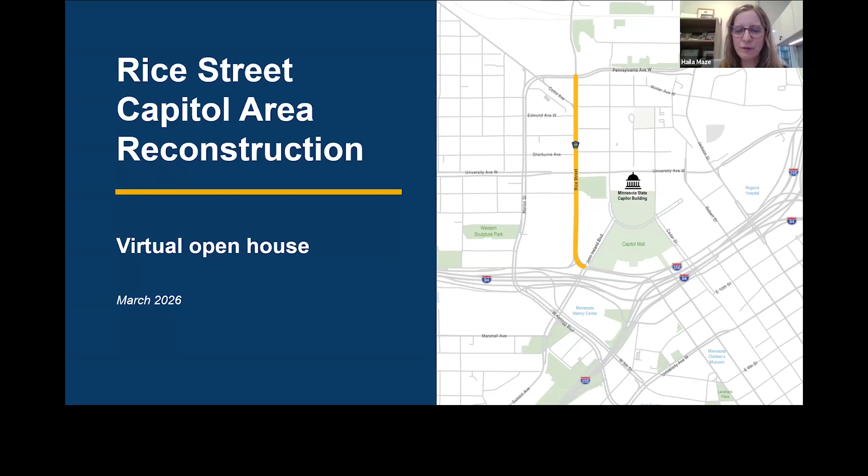We're going to start this presentation with a special poem by one of our Rice Street Engagement Team members, Malik Curtis, also known as Juice Lord. He is an MC, poet, actor, and educator from here in St. Paul, Minnesota. Raised in the Rondo community by older parents who instilled strong values of respect, love, and community, he grew up with a belief that it takes a village to uplift one another.

Greetings everyone. The poem I have for you guys is called A Field of Dreams. Here we go. Like roses that grow from the concrete, Rice Street has a field of dreams, where many kings and queens roam and call home. Through hardships, differences, the love has grown. Long live Bones, Rice Street's very own. When I think of Rice Street, I think of my youth, the community that nurtured and guided us innocent children through things we were oblivious to. Martial arts at Washington, where kids with dreams went to school. Batting cages, where the Winfields gave us the space for us to swing through that trauma or things that we faced. Mamas in coffee cup fed us, and with each meal we gave thanks. Rice Street has a field of dreams, better yet, dreamers that simply needs more resources and places where the creators and community can plan. Time is always flying each time we blink. So let's water the land so the roots don't dry out and the garden can expand. A field of dreams where dreamers in Rice Street advance.

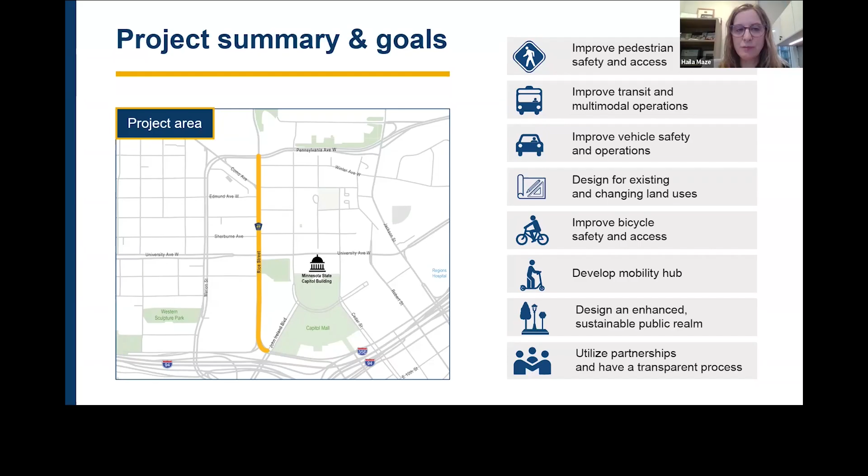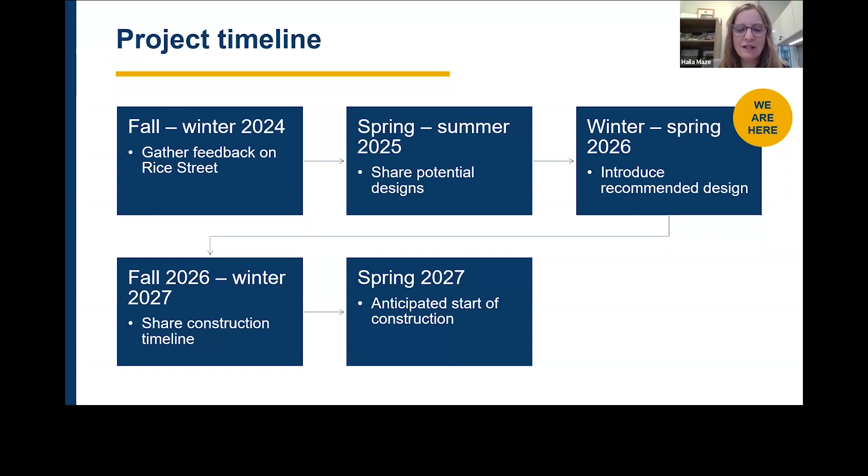The project timeline: this project has been underway since fall of 2024, when we first started gathering feedback on Rice Street through this segment. It will continue through 2027, when it starts construction. We're currently midway at the point of talking about the recommended design for the corridor and gathering input before we progress into a more final design phase later this year. You can expect to hear back from us again late this year or early next. As we get closer to the construction timeline, we'll have more details about the final project and what the construction phase will look like.

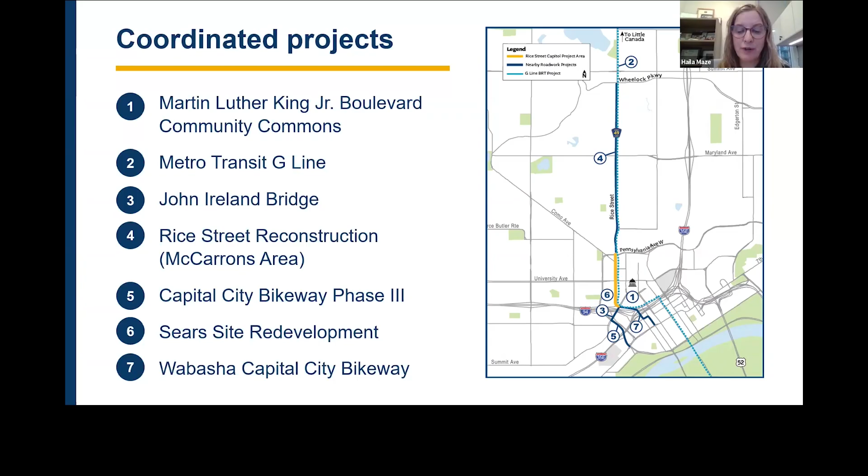Speaking of construction, we understand this project isn't happening in isolation. There are many other projects in this area, and we've been talking with these project managers and teams to make sure the project is well coordinated, both through the design and engagement phases, as well as during construction where there's overlap. These include the MLK Boulevard Community Commons area on the Capitol grounds, the Metro Transit G Line, which follows Rice Street through the section and is incorporated in our design, the replacement of the John Ireland Bridge, currently under construction, the Rice Street reconstruction phases already underway to the north, Capital City bikeway connections throughout downtown connecting to the southern end of our corridor, the future Sears site redevelopment to the west, and the Wabasha Capital City bikeway project, which is being coordinated closely.

Speaking of timing and construction, Rice Street is being constructed in multiple phases. Starting with phase 1 in 2025, the section from Wheelock to Maryland was completed last year. This year in spring, the section from Maryland to Sycamore and the Pennsylvania intersection will progress once it's time for construction to start. Then this project phase in 2027, from Sycamore to Pennsylvania and from Pennsylvania to John Ireland, will be completed during that time period.

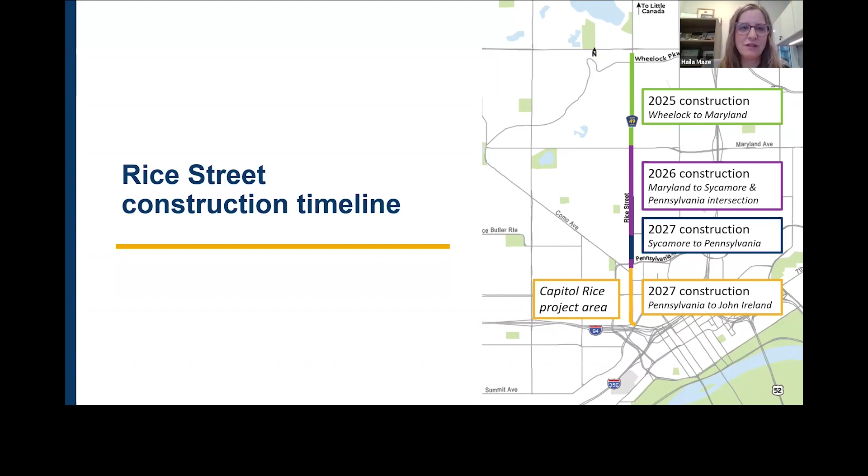All of these construction communications are being communicated through the same project team, and as mentioned later, please be sure to sign up for updates so that you can get the latest information throughout this process.

I'm turning it over to Abigail to give you an update on the engagement to date. Great, thank you. My name is Abigail, and I am an engagement specialist on this project. I will be running through some of the things we heard in our most recent phase of community engagement.

From March to July 2025, we had a number of engagement activities. We hosted 9 pop-up events. We had an online survey and comment map, as well as an in-person and virtual open house, much like this one. At these events and through these methods, we were asking folks about 3 different design options for the corridor and what they would most like to see on Rice Street.

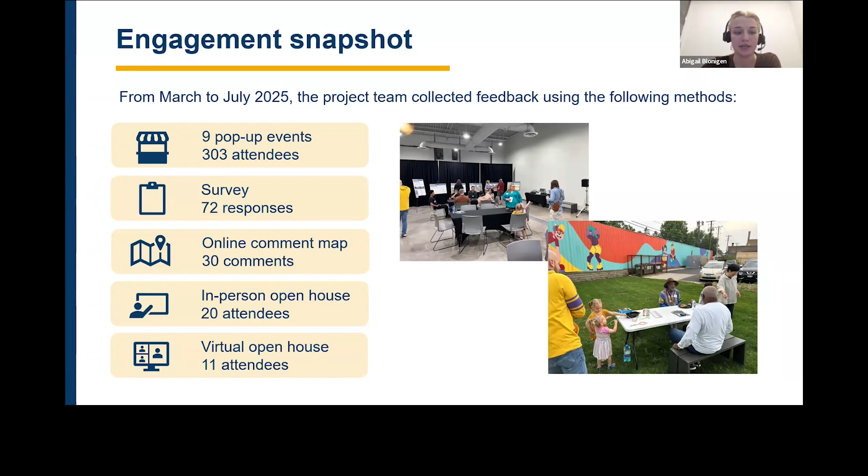So the first concept, as a refresher for those who didn't join us last time, or it's been a while and you forget these things, was a two-way cycle track. This looks like a two-way bikeway through the entirety of Rice Street. Some of the benefits of that was it was clearly marked where bikes and peds are supposed to be, but it also takes up more space on the corridor, which would especially have constraints north of University Avenue, where the road right-of-way is a bit narrower.

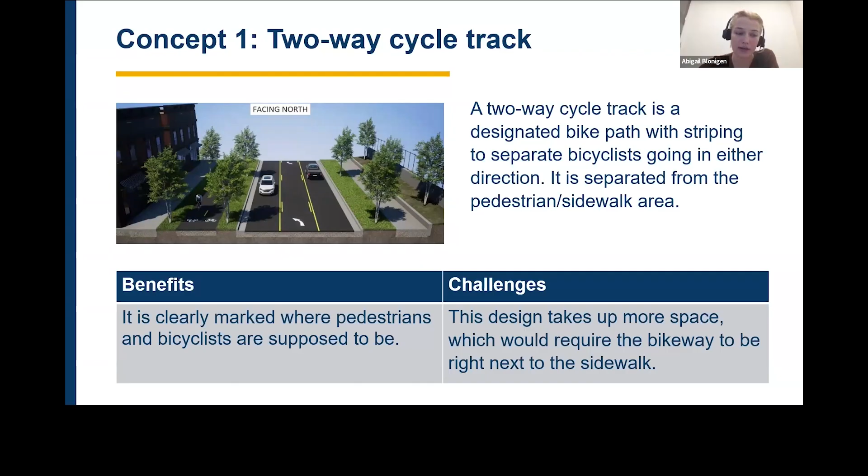The second concept was a shared use path. This takes up less space than the two-way bikeway, which would leave room for other amenities such as trees. However, one challenge is the potential for conflicts between bicycles and pedestrians, which is something we heard as a concern from community members.

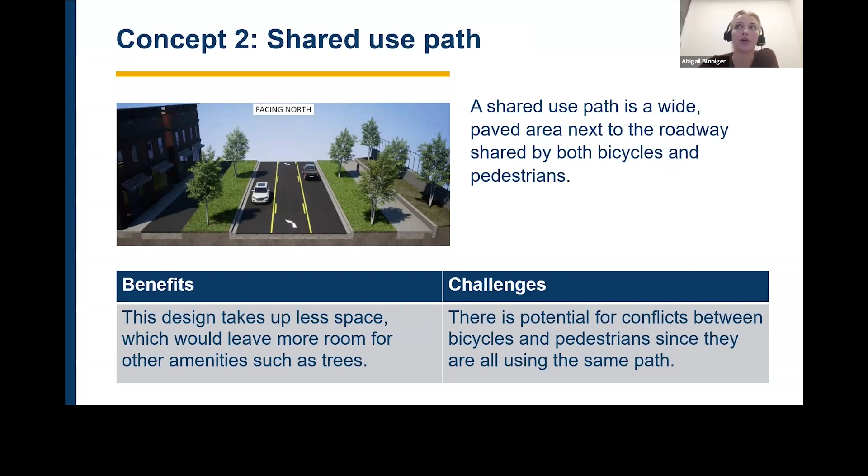The third concept we asked folks about last phase was a hybrid approach of the two different designs. This would have the two-way bicycle track south of University, where the right-of-way is wider, and then a shared use path north of University, where we have more constrained roadway space.

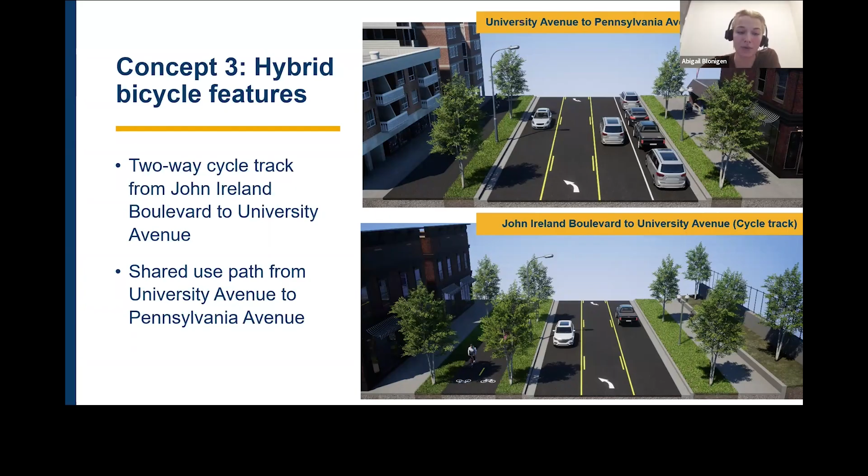When we asked folks about these designs, we asked them to rank them based on driving safety and access, bicycle safety and access, pedestrian, transit user, and general public space.

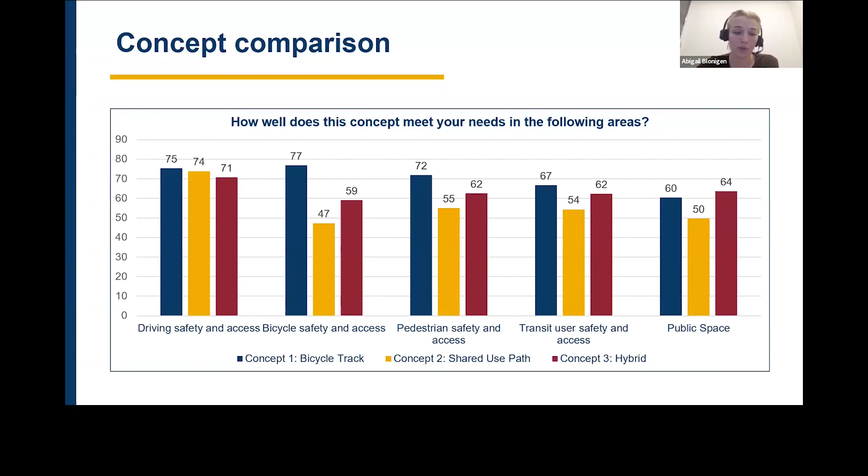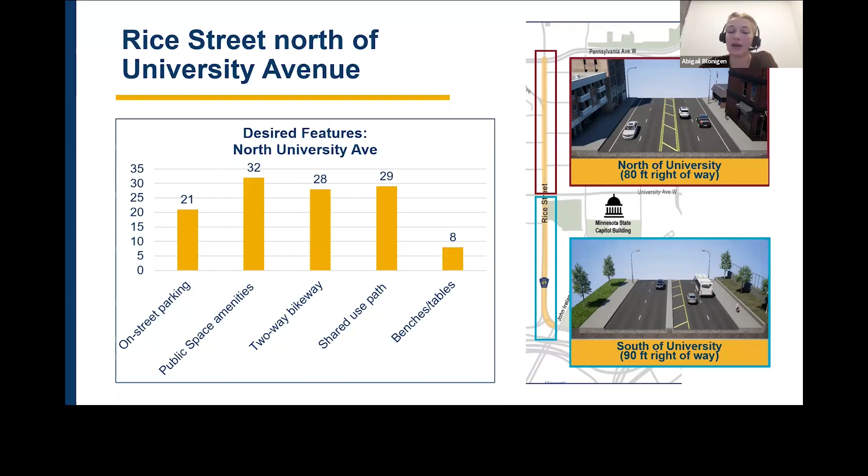Other questions we asked folks during our last phase of engagement were what they wanted to prioritize north of University Avenue, where we don't have as much space. We heard that people really wanted to see public space amenities, and the two-way bikeway or shared use path were essentially tied in terms of what kind of bicycle improvements people wanted to see.

We also asked folks what they would like to see in a mobility hub. A mobility hub is a place where people can connect with several forms of transportation, such as public transit, a bike or scooter share, and car share. These areas can also include additional pedestrian and multimodal amenities.

When we asked people what they'd like to see in a space like this, trees and greenery really took the cake as what people prioritized in this area. That was followed by tables, chairs, and benches, so places to sit and hang out, and public art was also a priority.

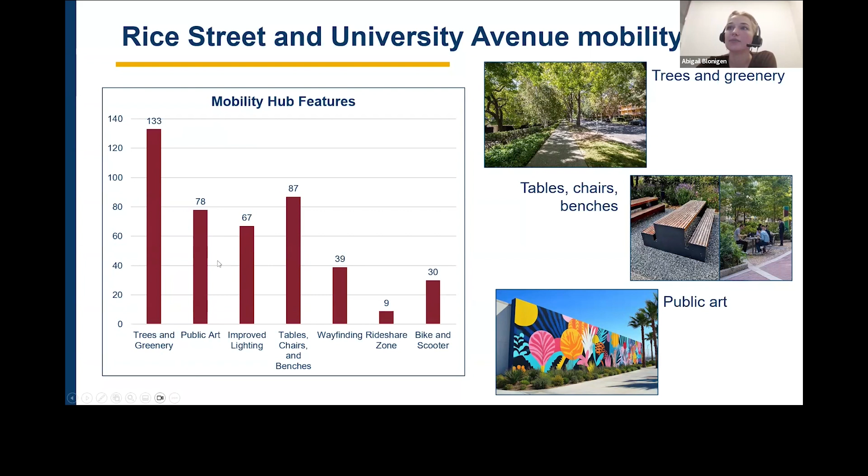Some additional things we heard from folks: definite calls for safety and accessibility, which has been a priority from the community throughout engagement. People wanted traffic calming interventions to slow down speeds in this area, and clear integration with transit, which we'll talk about in a little bit. We also heard concerns about potential on-street parking loss for businesses and roadway construction impacts, with emphasis on the safety and livability of the neighborhood as a whole. Once again, we heard a strong call for making sure there's space for public space, greenery, and things like seating and public art.

So with that, I will hand it over to Cody, who will talk about the recommended design. Thanks, Abigail. Hi, I'm Cody Christiansson, principal engineer with Bolton and Menk, and deputy project manager working with Hyla on the project.

I'll talk through where we landed with the recommended design. Abigail gave a good highlight on what we heard from the public. Taking that along with the City of St. Paul and Ramsey County priorities and initiatives, the recommended design was the hybrid concept, or concept three, that utilizes a shared use path for the bicycle and pedestrian facility north of University, and separates the two modes with the cycle track south of University.

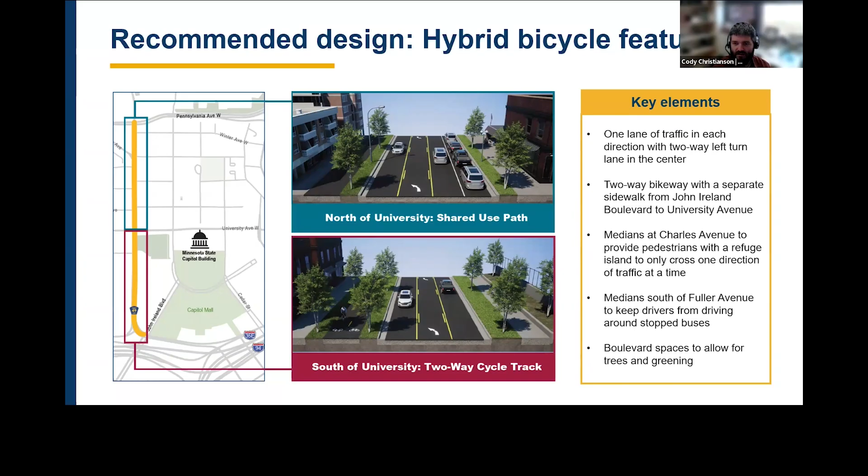This also gives us boulevard space to provide ample opportunities to improve the corridor greening and trees. This design really met both the community priorities and the city and county's considerations. It improves bicycle and pedestrian safety throughout the corridor, providing an off-street bicycle facility connecting the Capitol on the south to Ramsey County and northern St. Paul on the north side. We've brought in design elements that help slow traffic, medians, reducing travel lanes, and space for on-street parking in the northern segment. There's existing on-street parking today, so we're able to preserve as much of that as possible where it exists today in this future corridor consideration, supporting the county's commitment to an all abilities network through Rice Street.

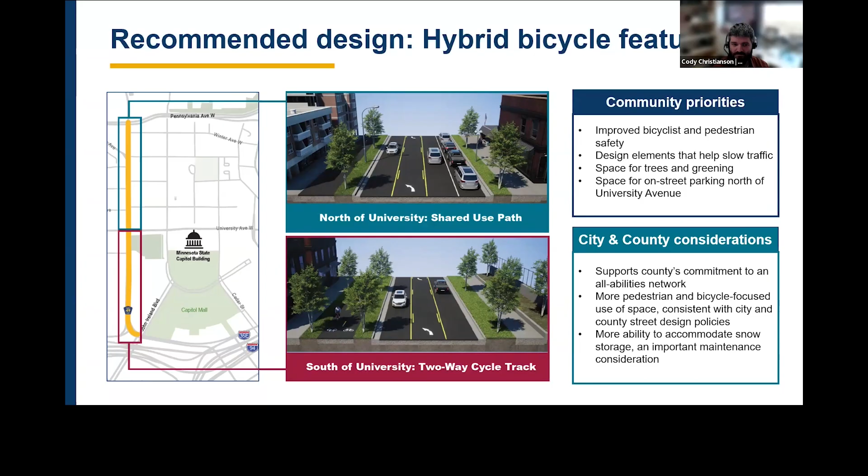And really making sure we provide that space for green stormwater, as well as snow storage and maintenance. So just gonna run through a couple of high-level graphics on what the corridor is looking like.

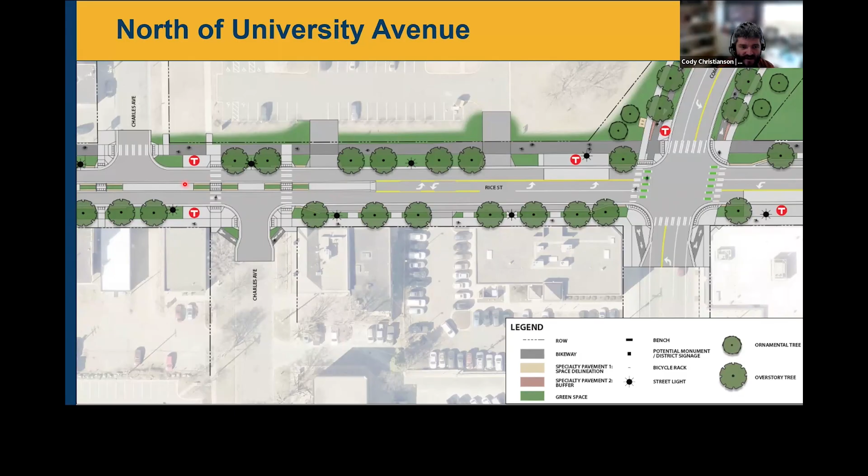On the other side of University, south of Aurora, to the bottom right is the state office building and to the top is the old Sears site. Here you have the two-way cycle track and sidewalk on top, and where those cross at Aurora is a raised crosswalk, and then the driveway into the Sears site. There's another set of BRT stations on the left near the MnDOT Transportation Building. Again, opportunities for greening, trees, and wide boulevards that also help with snow storage and maintenance.

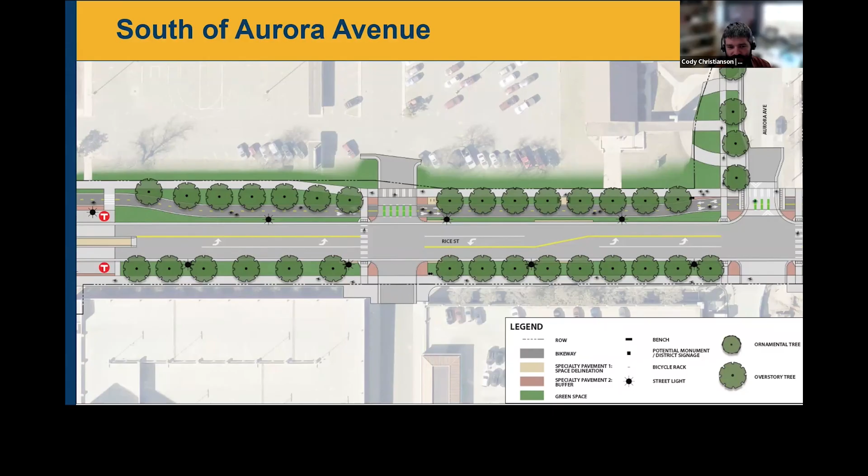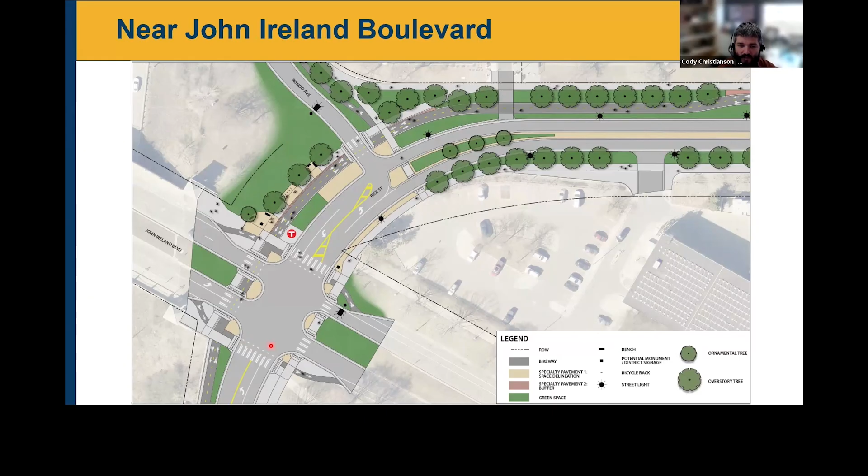Here we are shifting that intersection further away from the bridge, which helps with some of our multimodal connections through the intersection. We also have the connection to the Wabasha Extension CCB at the bottom of the screen, one of those coordinated projects we were talking about. Also, reducing the overall width of Rice Street and the connection to Rondo, making that a slower movement for people walking and biking to cross that intersection.

Amenities include bike racks, benches, waste and recycling receptacles, heated and lit shelters, and pylons with real-time signage. These stations are meant for fairly quick onboarding and alighting operation. You pay your fare on the station itself instead of on the bus. The curbs are also a little higher, so the buses don't have to kneel down for any accessibility passengers getting on. That's kind of what those will look like along the corridor.

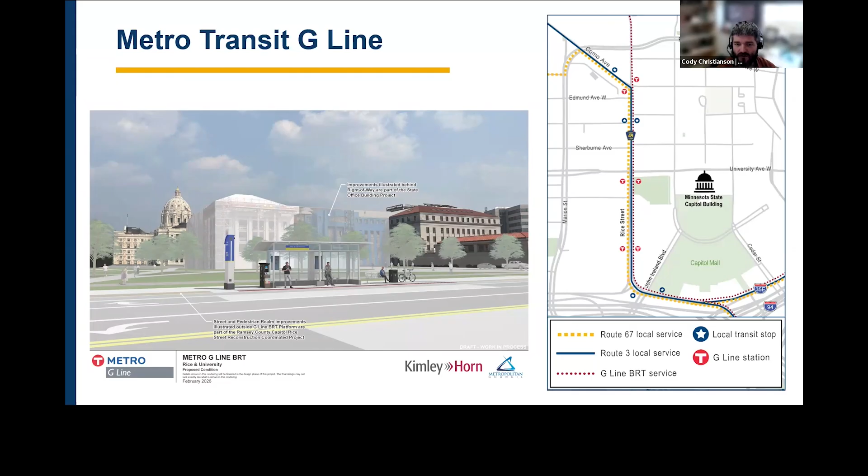And then lastly here, talking about that Rice and University Mobility Hub. This is meant to be a way of gathering multiple modes of transportation in an area. We have the existing Green Line LRT, we're bringing in bus rapid transit on the G Line, and bringing in a new bicycle facility. Lots of people coming to and going from the capital area. So we are developing an overall concept on how some of those things come together, looking at both Lot AA to the west of Rice Street, south of University.

Again, looking at ways we can connect to the BRT platform, looking at how we can provide opportunities for community gathering, for general public spaces outside of the capital area, as well as looking at any future green stormwater management, how we can manage runoff in the area and treat it before it gets to the Mississippi and Minnesota rivers.